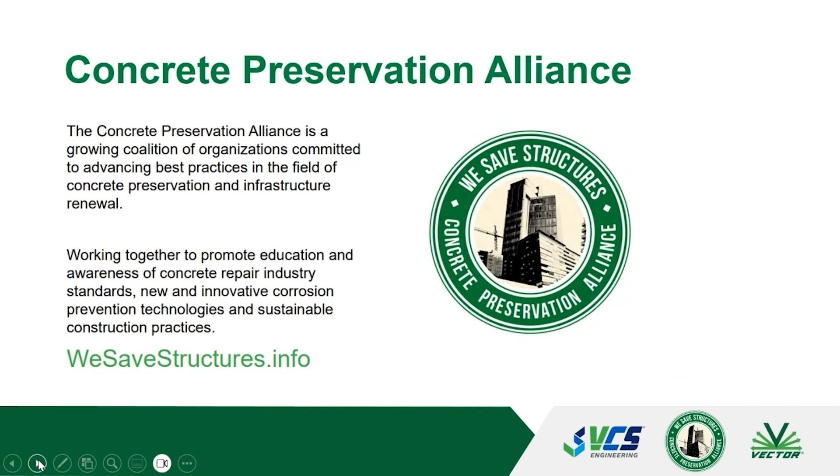Sustainability is at the heart of what Vector and the Preservation Alliance stand for. One of the most impactful actions we can take in our industry is to preserve and restore existing structures rather than replace them. Restoration not only preserves our architectural heritage but also significantly reduces environmental impact. On our We Save Structures website, we feature an environmental impact calculator. This tool allows us to compare the benefits of rehabilitation versus replacement for concrete structures. By entering the amount of concrete retained, the calculator provides valuable insights, including conservation of natural resources, reduction of solid waste in landfills, water savings, and minimized carbon emissions. We strongly encourage engineers and owners to leverage tools like this to make informed, sustainable decisions for their projects. Together, we can contribute to a greener, more sustainable future.

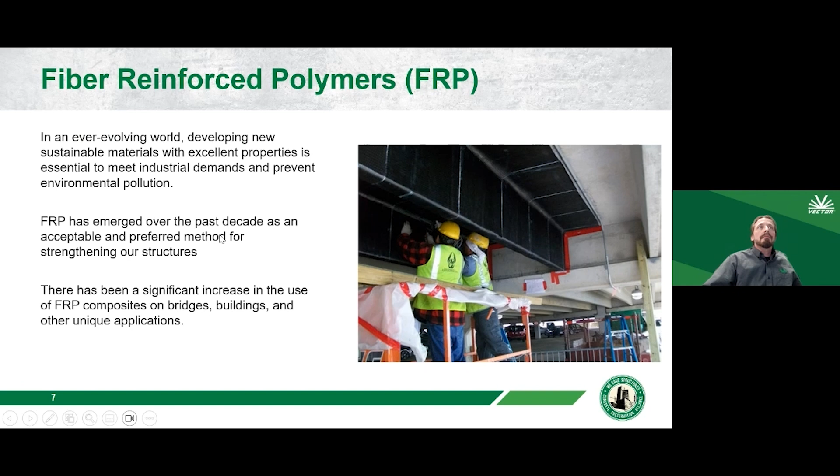For today, the presentation will consist of the concrete preservation process, where we'll take a look at how we determine whether FRP is a viable option for our structure or not. We'll briefly go over what codes and guidelines exist, what FRP is and its common uses, its considerations, the installation process, how we ensure a quality product through quality assurance and quality control activities, sustainability, and then case studies.

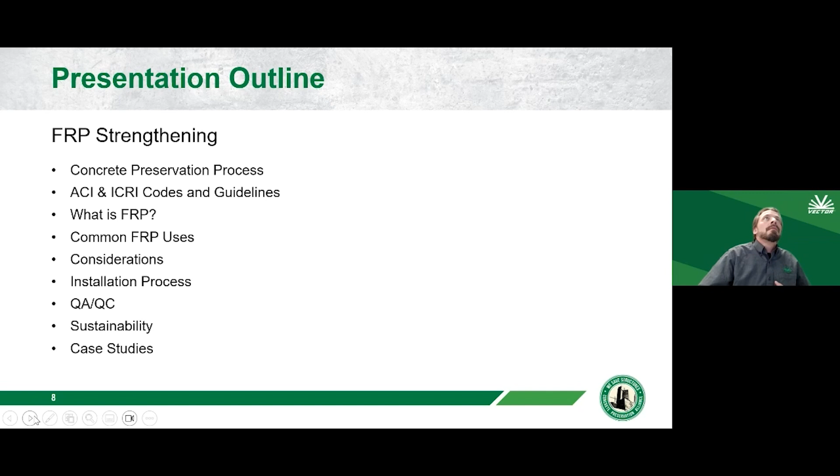When we look at the concrete preservation process, it starts usually just with a visual inspection. We want to take a look at, do we have cracks, spalls, what's going on with that structure? And then we take into account change of use. How old is that structure? What may have happened to it in its life? Was it overloaded at one point? Was there impact damage? And then what do we really want to get out of it?

As we look through this chart, the third column from the left, we have determine the cause. A lot of times with carbon fiber, we'll see new uses such as overloading, change of use, code changes. Something's changed over the years, or it's not uncommon where a brand new structure is completed and we see some defects, and carbon fiber can add additional strengthening that may not have been installed in the first place.

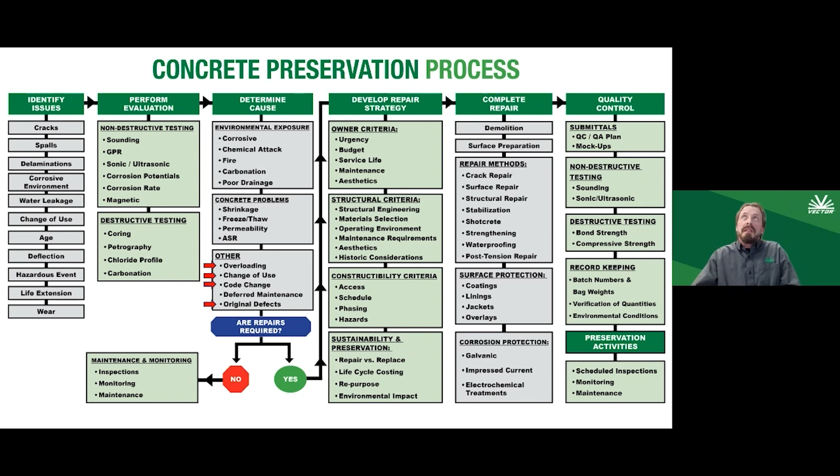Once we then look to determine the cause and why we would want to use carbon fiber, then we'll look at life cycle costing, repair versus replace, and then go through the rest of the process of doing the repairs, quality control, and quality assurance.

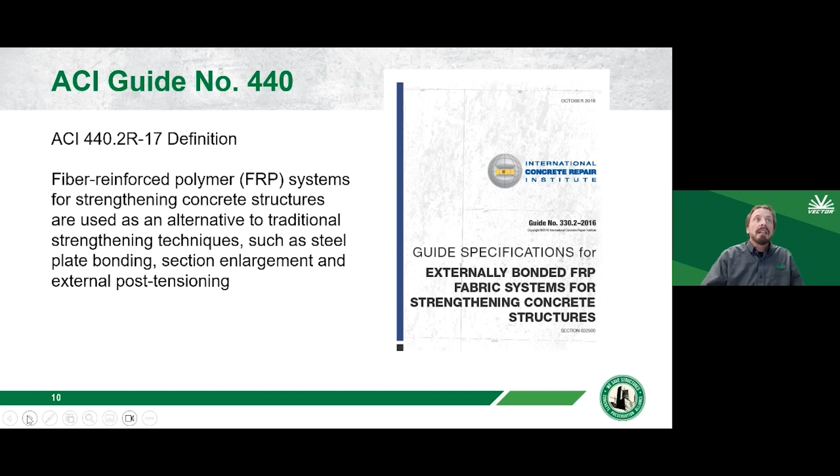Just to touch on it and know that they exist, ACI, American Concrete Institute, and ICRI, the International Concrete Repair Institute, both provide a good deal of guidance for using FRP systems. Not in all cases is FRP going to be the best solution, but if it is something that is being considered, these guidelines are a good place to start.

So what is FRP? FRP is a composite strengthening system that usually consists of either carbon or glass, and it's adhered to the surface of the concrete or sometimes installed in channels using an epoxy resin or a paste.

Carbon fiber itself is high in stiffness and tensile strength. It doesn't weigh much. They make golf clubs out of it, use it in aerospace, what have you. It's incredibly strong, lightweight. It does have good chemical resistance properties. We do have to watch it with heat because the epoxies don't like high heats, and it's got complementary thermal expansion to the parent concrete.

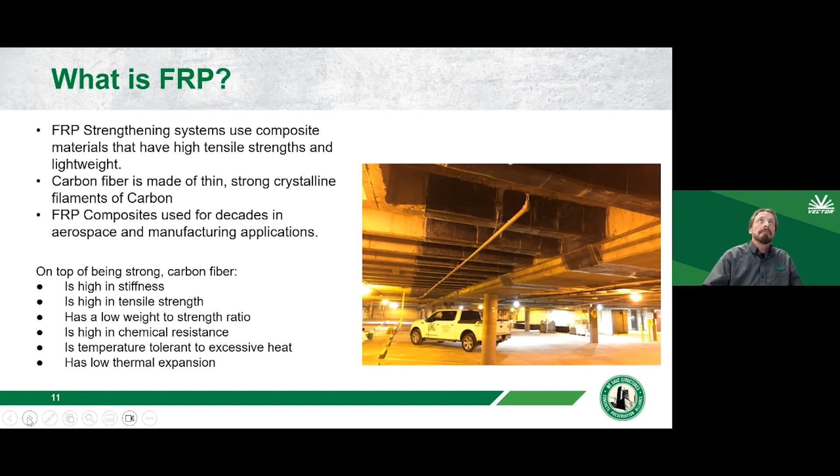Again, to reiterate, it's lightweight, it's flexible in its design. So when we look at designing with fiber reinforced polymers, oftentimes you will treat it in the same way that you'll look at steel. Is that steel acting in a flexural way, in a shear capacity, or in confinement? And in a lot of cases, carbon fiber or glass fiber will mimic those kind of design considerations.

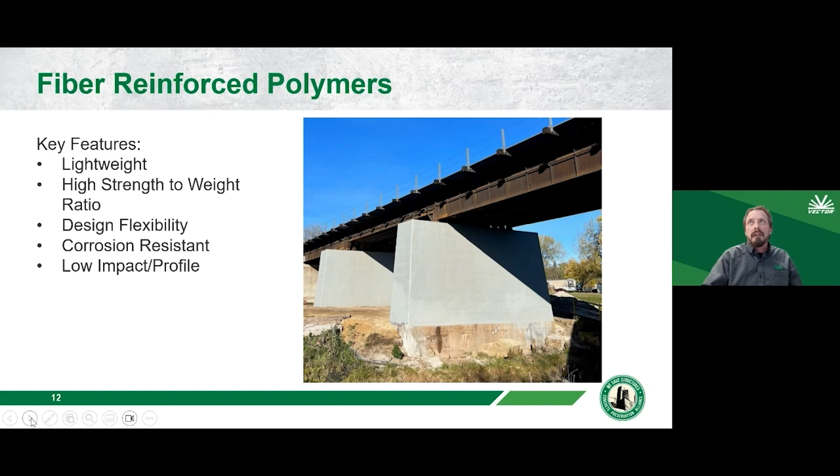Glass fiber is often used to confine repairs, to integrate repairs into parent concrete. It is cheaper per square foot or per square meter. However, the installation is identical. We use the same kind of resins. Access would be the same. Nothing really changes in that respect.

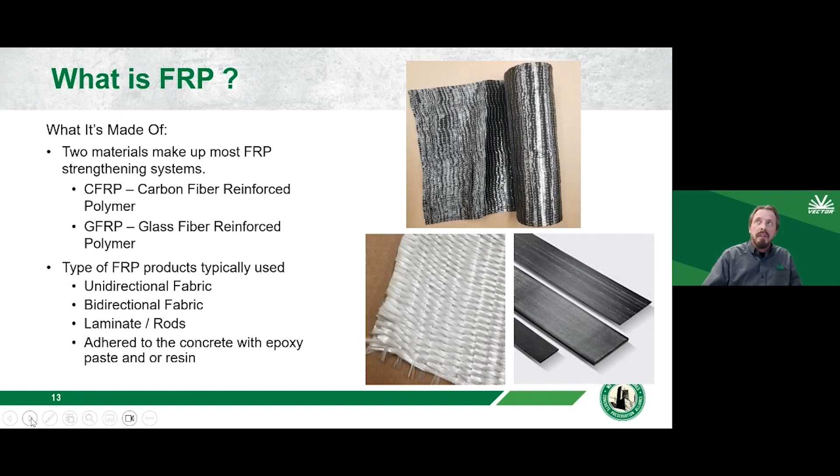As far as applications, we've seen it used on wood, steel, and then of course concrete. It's used for strengthening shear and axial loads, surface mounted, seismic upgrades, barriers. If there is damaged or lost reinforcing, so if you've lost reinforcing due to corrosion, or some wasn't installed in the original design, or for instance, change of use and loading.

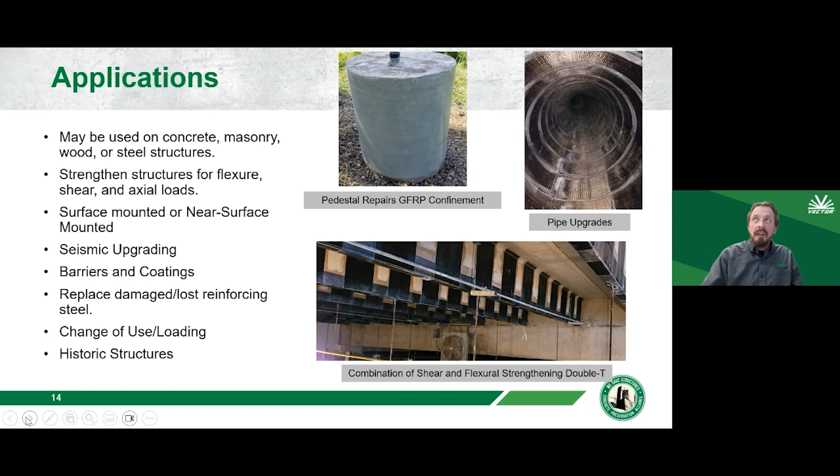We're just seeing much more of that nowadays with owners repurposing buildings for different uses, and then of course historic structures. In the top photo there, we have used glass fiber just to confine that pedestal, pipe upgrades, which is a whole different kind of situation where carbon fiber and glass fiber is used. I'm not going to touch on it too much today. And then of course, conventionally, we see beam strengthening in a flexural way with shear wraps.

Benefits of using FRP, like I said, it's light, it's low profile. We don't need just adequate scaffolding. We've done a lot of carbon fiber, glass fiber installations over the years using aerial lifts.

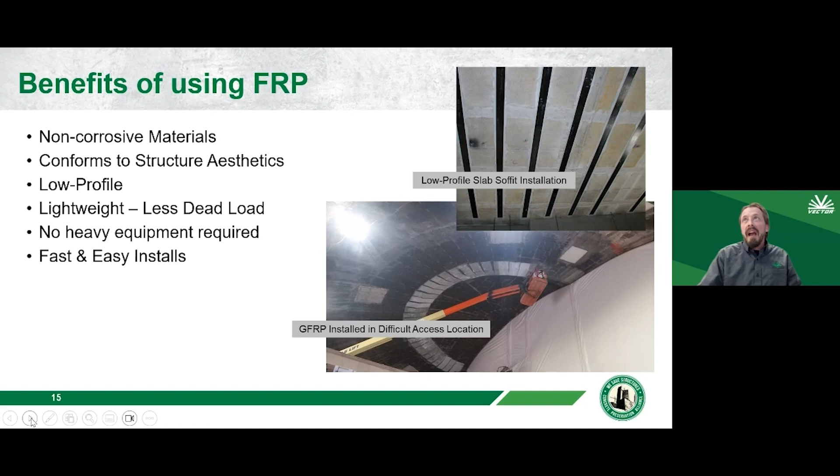Pretty fast and easy to install, and you get a lot of strengthening for that effort. Some of its disadvantages...

Carbon fiber, you do pay a premium for the material itself, but you typically save on your labor costs. One thing you need to be aware of when using fiber reinforced polymers is that they can conduct heat and electricity. It's not common, but it's just something to be mindful of when you're looking at this as a possible solution.

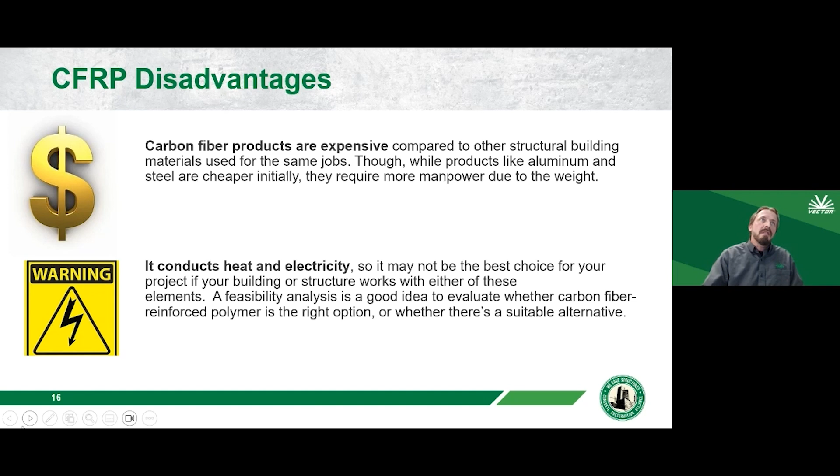Project-specific considerations. So I come from construction, I'm not an engineer, I'm not a designer. So these are the types of things that I'm really looking at when I'm working with an owner on using FRP as a solution.

We want to know what the access is. How long will that access be there? Because that has a cost to it. And will that access disrupt the operations of that facility? Will it affect pedestrian or vehicle traffic?

Of course, building codes. So when we're using FRP in a residential or a commercial setting or a facility that is habitable, these are things that we're going to have to look into and make sure that if there's fireproofing that needs to be installed, that we account for that in the development of the project.

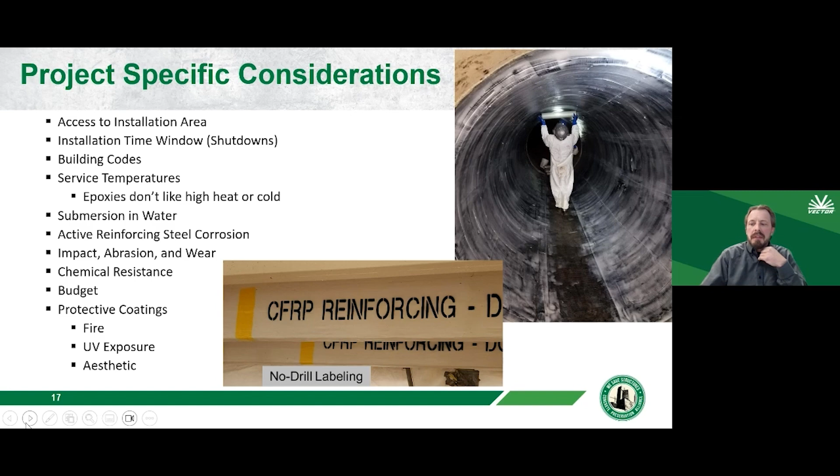The nice thing about FRP is that it can be coated with a top coat, typically an acrylic or a urethane, that is relatively inexpensive.

What we don't want to do is have active corrosion going on, wrap that structural element, and then that corrosion still keeps perpetuating, and we've got spalls and delaminations of the surrounding concrete. It's a big deal, and what happens is that if there's fracturing going on inside of that column because of active corrosion, that carbon fiber isn't participating fully within that structural element.

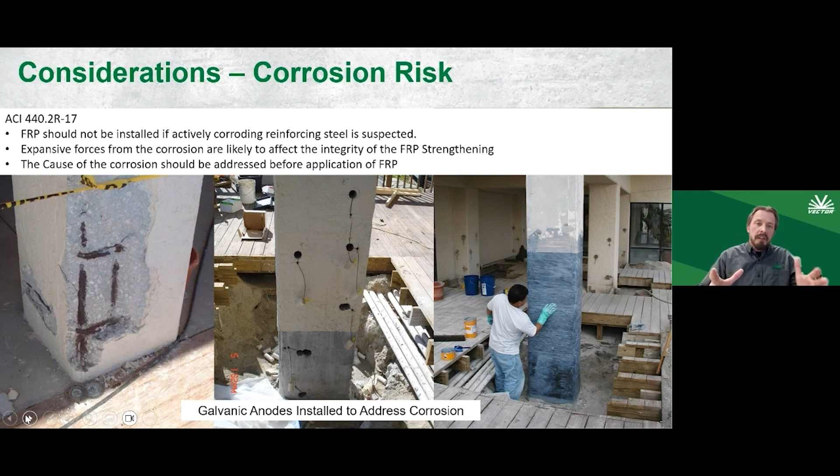So the project process, the pre-construction items. When we looked at the development process for repair, condition evaluation, and assess the damage. So we want to know what the existing conditions are, and these are all going to fall in line with what that FRP designer is going to need to develop a design for the structure.

We want to know the condition evaluation and assess the damage. Is there widespread chip and patch repairs that need to be done? Are there crack injection activities that need to be performed prior to installing any sort of strengthening?

I've been on projects where we've done both, where we've got the original plans. That's fantastic. We know what the reinforcing is there.

Sometimes we'll verify it just to be sure with ground penetrating radar. But a lot of times, especially on an older structure, the plans just simply don't exist anymore. So we're going to take that information and give it to the engineer of record or the FRP design engineer.

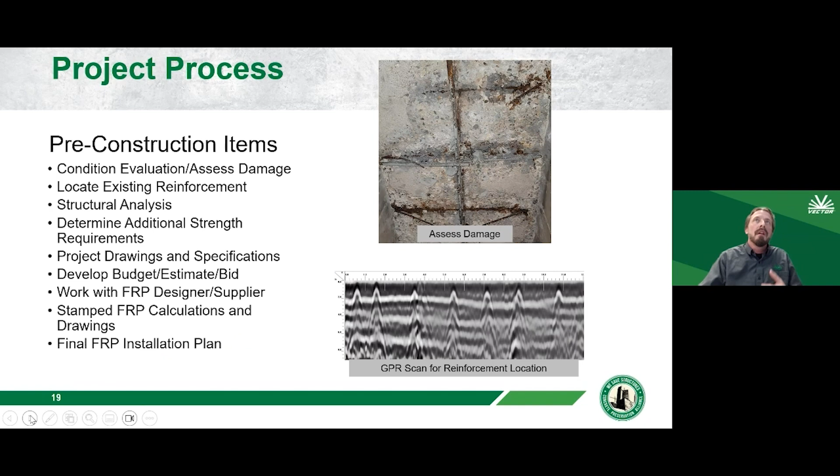After all of that, the rest of that process will include the FRP design shop drawings, and that's what the construction crews will use to install the FRP. Typical FRP design drawings are usually very simple. They don't need to be too complicated. We need to know spacing, offsets, and size of the fabric, so we can determine how much fabric or material we're going to need to install.

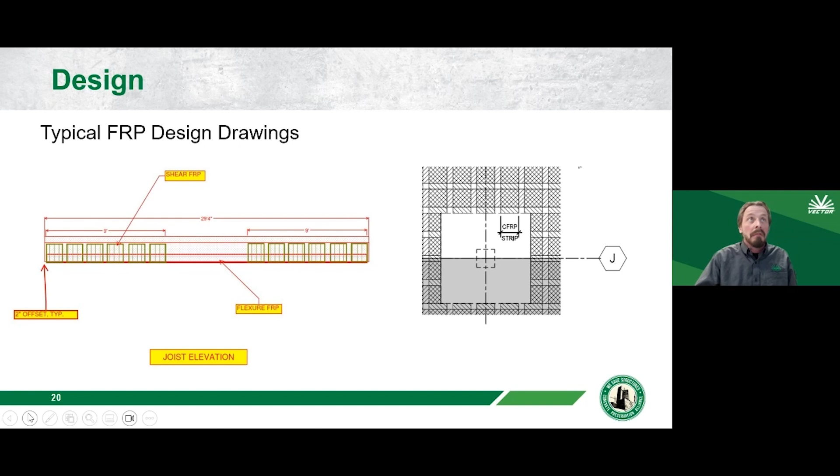Safety considerations: the surface prep for FRP is critical, and it does create dust. On smaller projects, we can use an aggressive disc on a grinder. For large projects, it's preferred to use sandblasting. Either of those activities are going to generate a fair amount of concrete dust.

So we want to make sure that we have the right kind of containment and make sure that the installers have the proper protective equipment, whether that be a respirator, eye protection, ear and hearing protection, and that we meet all of the different OSHA standards. Additionally, when we install the FRP, we're using epoxies, and epoxies of course then require their own set of safety considerations: eye protection, different gloves, Tyvek suits, what have you.

So all of this will factor into the price of the installation. If we're installing something in a hospital, the containment is going to be much more robust than a bridge out in the middle of nowhere, and we're going to have to account for that.

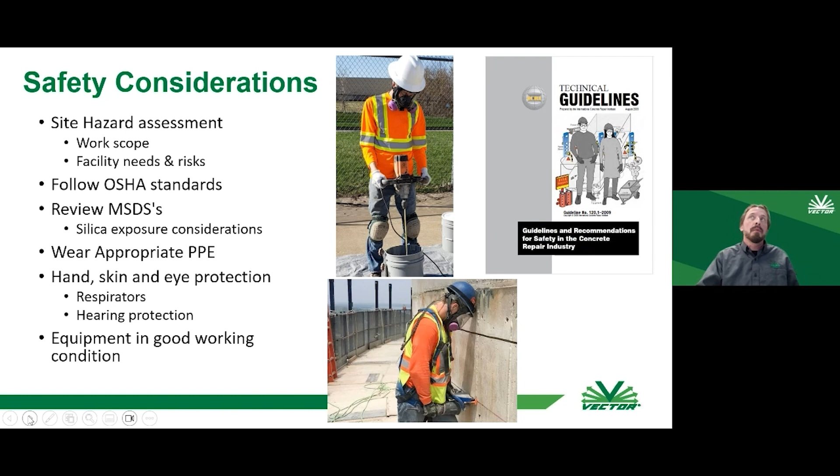Once we've got those variables figured out, we get into the layout of the FRP product. As you saw in the design, we wanted to put FRP on a beam. This beam is coated, and we want bare concrete. We can't install FRP over any sort of coating, paint, or anything else that's there. So we grind the existing coating off and open up the pores of the concrete. We want that epoxy resin, and we want the ability of that resin to adhere as best we can to that parent concrete, and then we make sure that it's all cleaned up and ready to go.

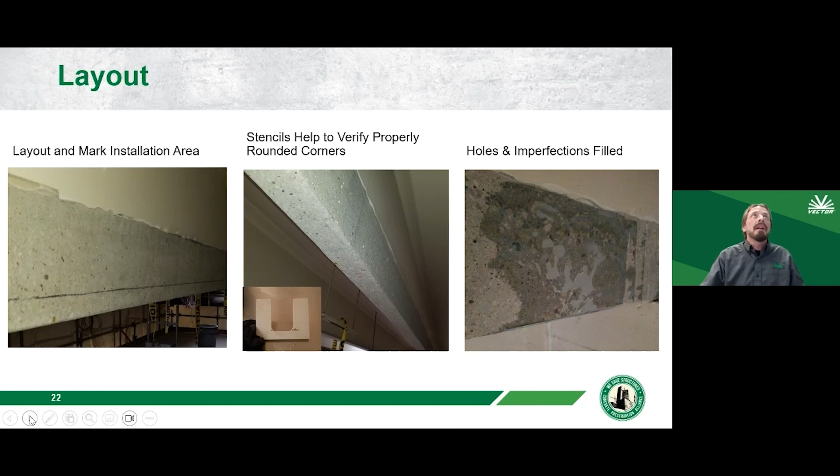The project process is fairly straightforward. We repair the cracks, usually by epoxy crack injection, and address concrete spalling, restoring the concrete to its original cross section, and then allow for those repairs to cure. Typically, when we know we've got to do repairs and then FRP right after, we'll use a high performance repair mortar. Again, it's going to cost a bit more, but we're going to save on time. So we want something that sets fast, sets hard, and hydrates quicker, so we can get on it and install the FRP quicker.

Oftentimes we don't have full access to the FRP repair or installation area. We know we need to strengthen some beams, but in the development process we may not have access to all of them. Once we have access, we confirm the measurements match what was designed. If there are discrepancies, it's typically not too big of a deal, we get back to the FRP designer and discuss what to do, whether that involves different detailing or adding some FRP. We're typically very conservative early on in that process.

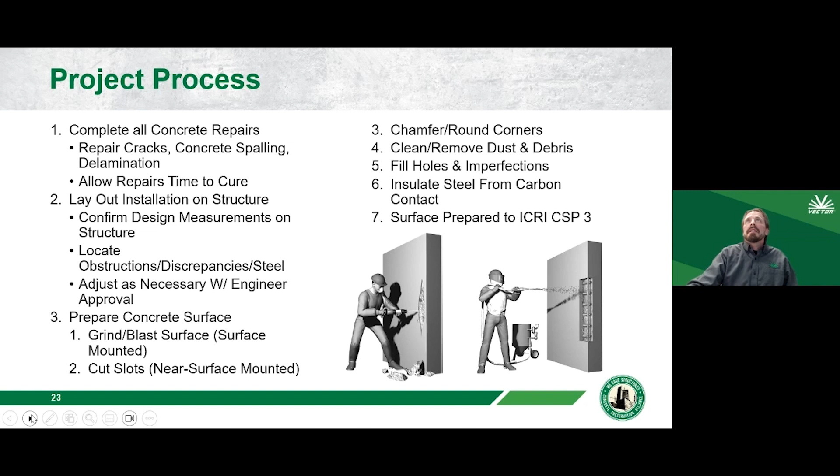An important thing to note is that the concrete must be cleaned and prepared to have a surface profile, CSP, concrete surface profile of 3. ICRI, the International Concrete Repair Institute, provides really good guidance on this.

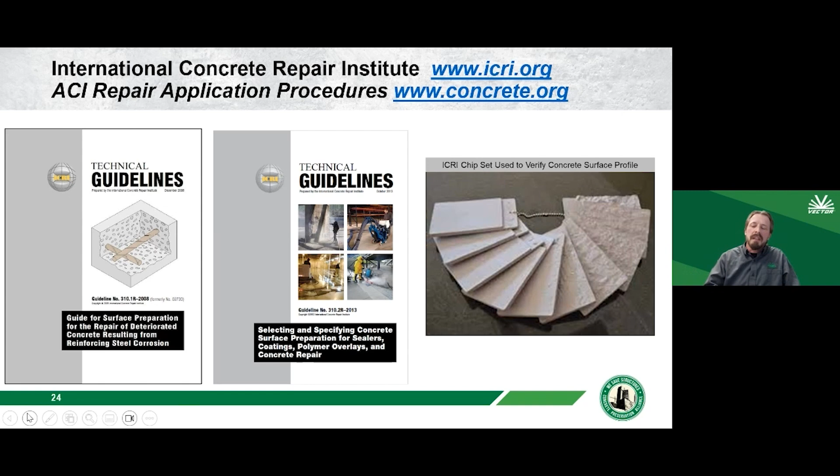As you see on the right, we have the ICRI chip set. In the field, you can bring this chip set with you and say, here we need a CSP 3 or 4 - this is the texture of that concrete - and compare it to what the technicians have achieved during their surface prep.

Typically that's achieved by a very aggressive disc on a grinder or by sandblasting. This holds true with all coatings that go on concrete. You're going to see a concrete surface profile identified by the manufacturer, and we want to make sure we achieve that profile prior to installation of either the FRP or a coating.

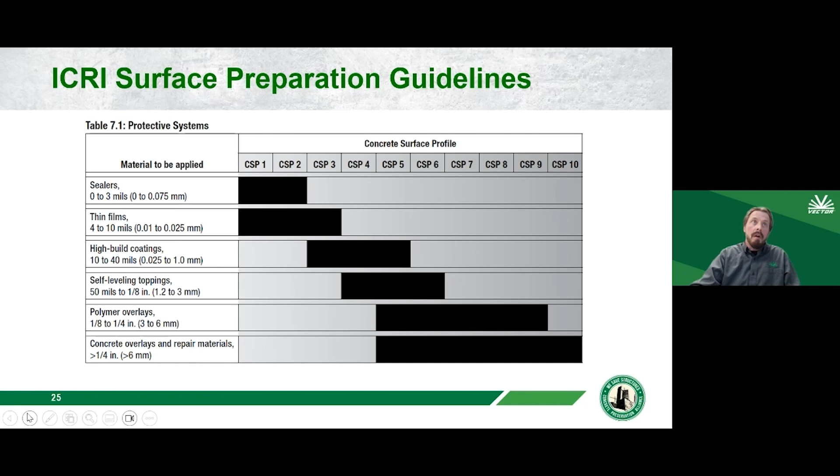Once everything is surface prepped to the correct profile, we get into installing the FRP itself. We want to set up as close to the installation area as we can, especially if dealing with hot or cold temperatures, to expedite the process. We saturate and then get the fabric or laminate onto the concrete that's going to be protected, giving the technicians time to work it over and make sure it's well adhered.

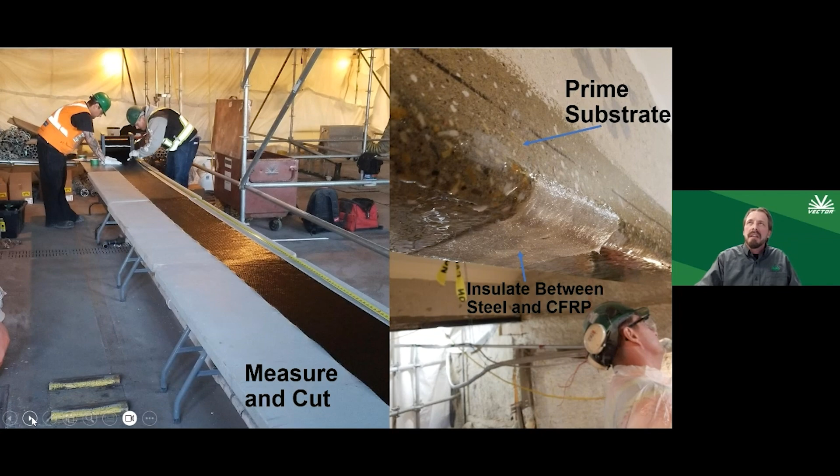One thing of note on the right-hand photo: insulate between steel and CFRP. Anytime there is embedded metal or steel, we have to isolate it from the carbon by using glass fiber. Carbon will react to embedded steel or metals, and carbon will deteriorate over time if this goes on too long. It's not that big of a deal, we just need to be aware of it. So if there's anything embedded that needs to remain, it's not a big deal, we just need to make sure it's isolated.

A typical installation is to cut the FRP to size. FRP typically comes in a 300-foot roll, depending on the type, but we want to put up the largest pieces possible - we don't want to splice if we don't have to. If we do overlap, the FRP designer will provide what that development length or overlap length needs to be between two different pieces. But the objective is always to put the biggest pieces up possible.

On this project we had flexural strengthening. You can see the fellows on the right putting up a flexural piece, with some stirrups and U-wraps around the bottom of the beam. So we put the big pieces up, and our offcuts get cut into smaller pieces as required.

We do the surface prep, then saturate the surface of the concrete with an epoxy resin and let it become tacky. Then we saturate the fabric itself - you can see the technicians there rolling the fabric, trying to work the saturant into it. We do have layup machines we can use as well.

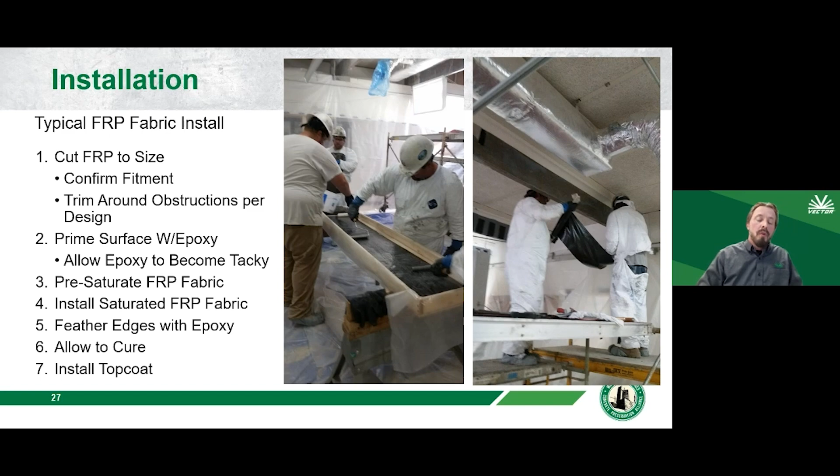So you can do this by hand, or with the machines - we use those on very, very large projects to saturate the fabric. Once it's fully saturated, we install it into place, work it over by hand, and allow it to cure. Once everything's cured out, we can install a top coat.

So you can see the layup table. The technician on the left is saturating the resin, getting it ready for installation. And then on the right, you can see on the seams, they've detailed the edges of the carbon fiber fabric with a paste epoxy. That's just to ensure that the edges are tightly adhered to the concrete using a paste epoxy.

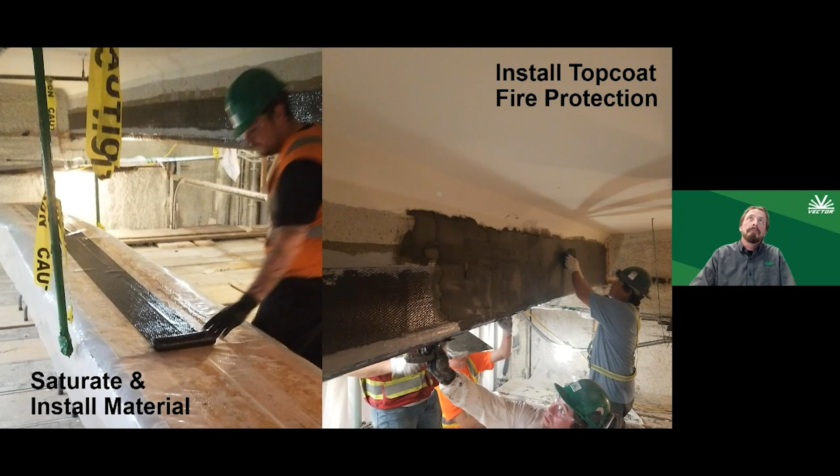Quality control is critical. This is part of a structural design. There are different steps to this process that need to be done correctly along the way. So we have ways of testing and checking and making sure that it's being installed per plan, per design, and that we don't have any problems down the road.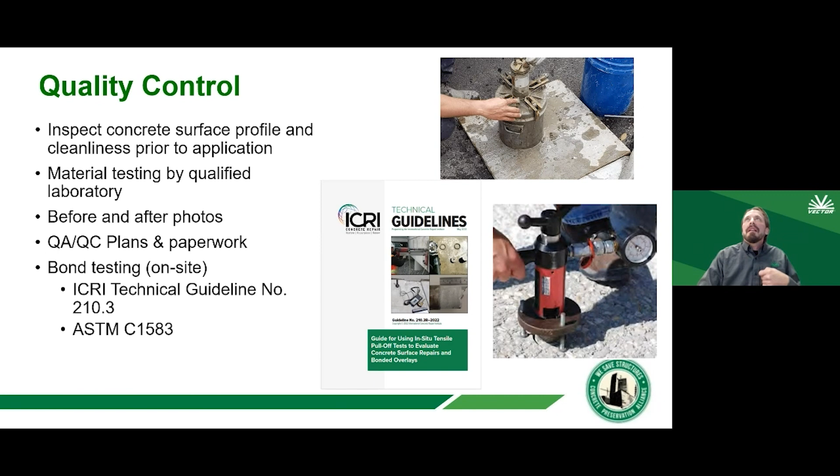So before and after photos are a great place to start. We have QA, QC plans and paperwork, and then of course ICRI and ASTM do provide different standards for testing and ensuring that we have a proper installation.

So quality control, this is a typical sheet. We want to know what's the ambient temperature. We don't want to install this when it's blazing hot or if it's incredibly cold. Epoxies don't like hot temperatures, and they don't like cold temperatures. So we want to make sure that our ambient temperature, whether it's inside of a containment or inside of a building or whatever, is correct and not too hot, not too cold, and that steps are being taken to ensure that the layup environment is conducive for the installation of FRP.

We don't want high relative humidities or dew points where we're having condensation of water on the concrete. You might see that in a coastal area or something like that. Surface temperature, and then making sure that it's not wet or damp.

We do use a moisture testing meter where we can set it onto the surface of the concrete and it'll tell us the percentage of the moisture on that concrete. Typically we want the moisture below 3% prior to installation of a carbon fiber fabric.

And then we want to document the lot and the batch numbers to make sure that if down the road we've had a bad batch or something was wrong along the way, it's documented. We know that, hey, beams 2 through 5 have this lot number, and then the other beams are that lot number. And then of course our bond pull-off tests.

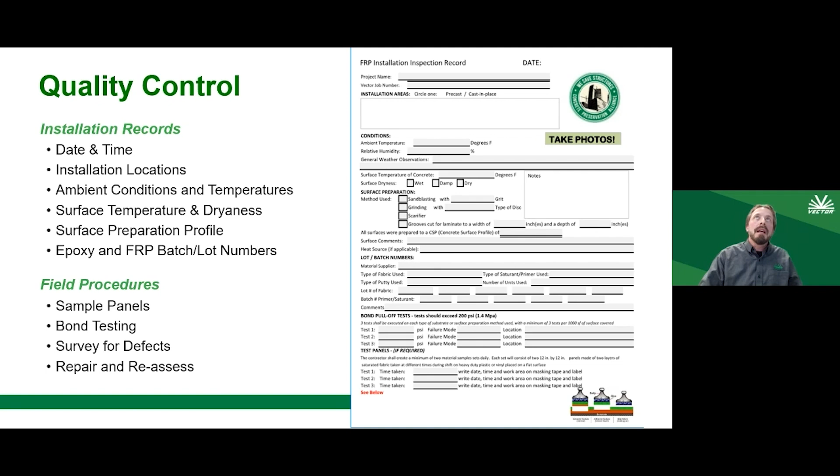So pull-off test is pretty straightforward. These can be done at random, and then you would have to put another piece of carbon fiber over the top of it. Or a lot of times what we'll do is put an extra piece up that we can use for testing so that we're not putting holes into the fabric that is part of the design. We want to make sure that this will tell us if we've mixed our epoxy correctly, that we've got the correct surface prep done on the concrete itself, and that the installers have laid and installed the fabric as tightly to the concrete as possible.

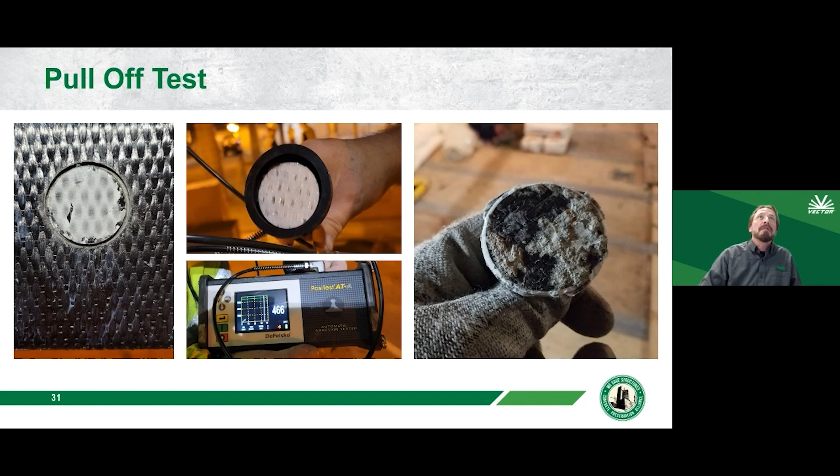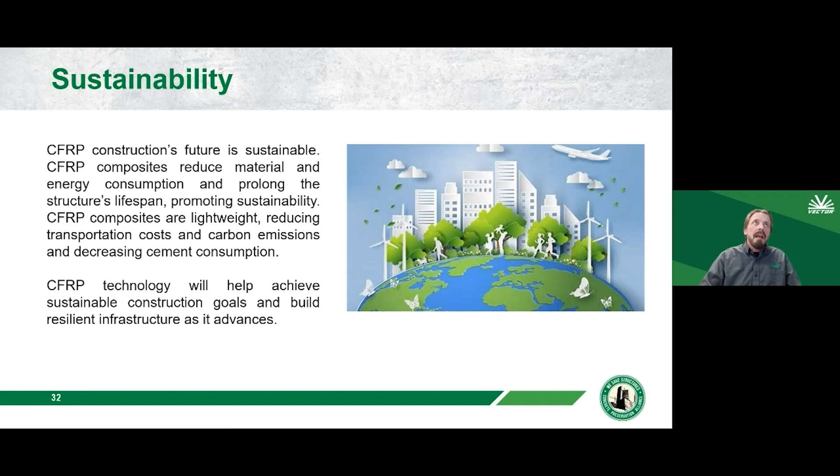This is one tool that we have to ensure sustainability of our structures into the future. The objective is to utilize what we have in our infrastructure and take care of it, maybe repurpose it for other means, and FRP is a technology that we have at our disposal.

Seismic retrofitting, where are we seeing it often now? Of course, different parking structures and bridges and those types of structures, but we're also doing a lot with seismic retrofitting, and then the increased use of EV. So EV vehicles are battery powered. Those batteries are heavy, and so now we're looking at parking structures and adding carbon fiber and strengthening those parking structures.

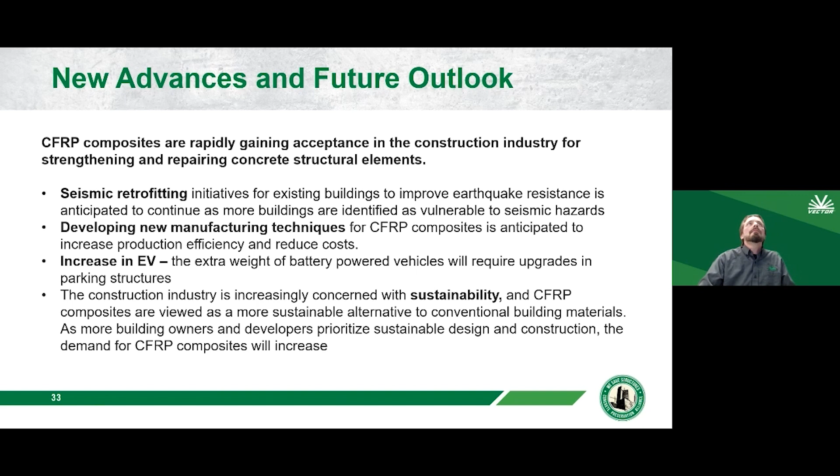To accommodate that, we're going to jump into a wind farm project that was recently done in the Midwest here. As you can see, these are large structures. The concrete foundation and pedestal take quite a bit of load. In this case, the engineers were able to say, hey, FRP is a good solution for what we're needing for the performance of this pedestal and foundation.

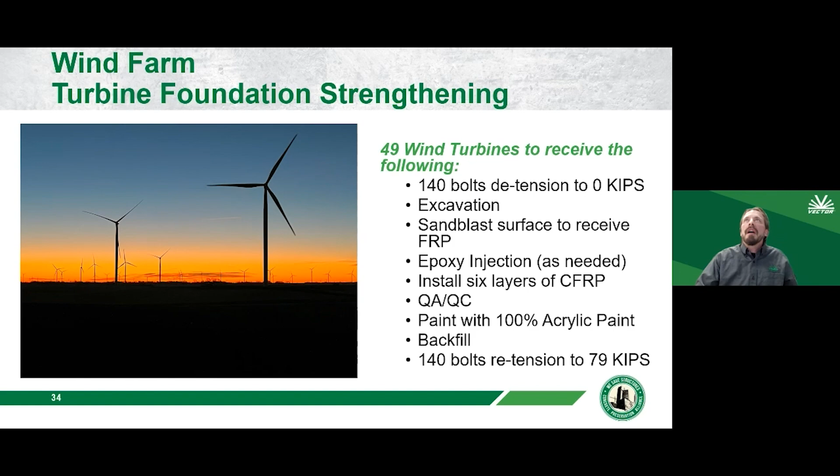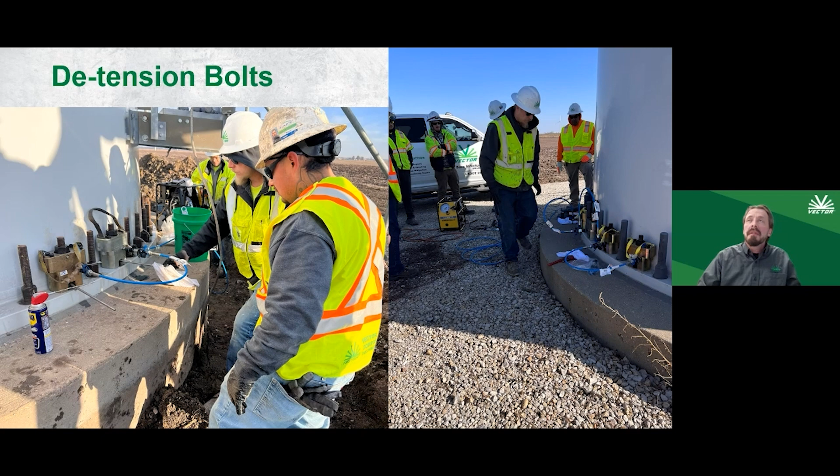So in order to do that, we had to detension the bolts. There's 140 bolts, with a row on the inside and the outside of the steel shaft that are embedded down into the foundation of a wind tower. They detension all the bolts and then begin the excavation process so they can install the FRP fabric.

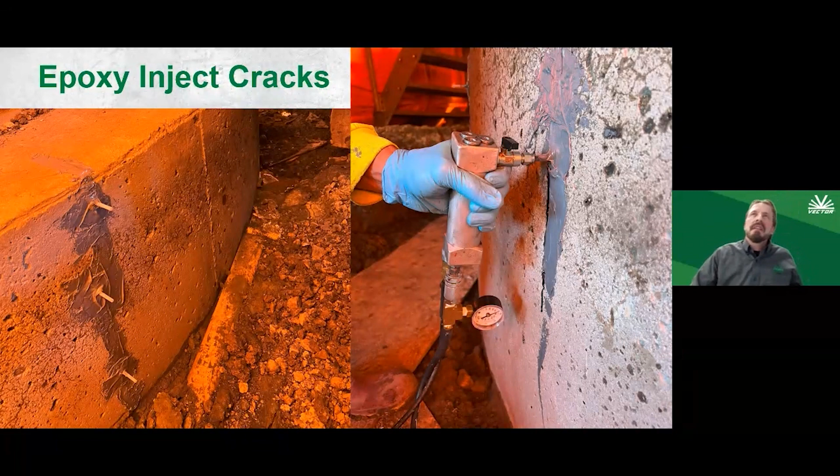Prior to the installation, once they excavated and exposed the foundation, they saw there was cracking involved. So the simple fix was to inject all the cracks with epoxy, let that set up, and then perform the FRP installation.

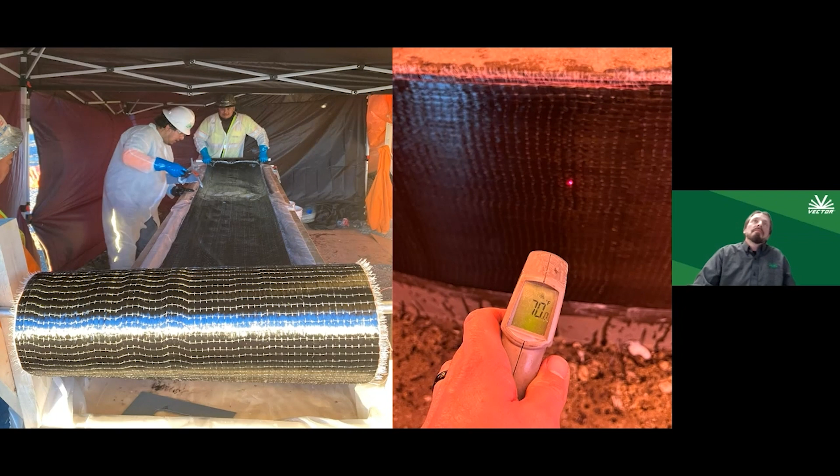In this case, the FRP was installed during the winter, so the containment was set up with heating so we could bring the temperature of the concrete up to an acceptable heat, and then wrap everything, using that same heat to allow the FRP fabric to cure in place. It was a constant process, and on our layup table we want to lay up as big of pieces as we can around the circumference of that foundation pedestal.

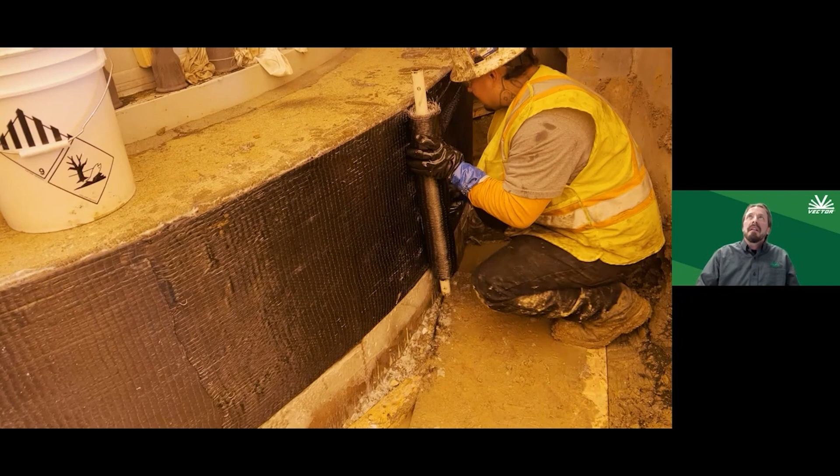So we saturated the fabric. Typically we'll use a dowel or a piece of pipe for very large pieces that are going to be installed. Get everything saturated, get it into the technician's hands so they can work with that fabric and get it installed. You don't see in these photos that there are other technicians behind the installer smoothing down the fabric, getting rid of the bubbles, and making sure it is as well adhered to the concrete and subsequent wraps as possible.

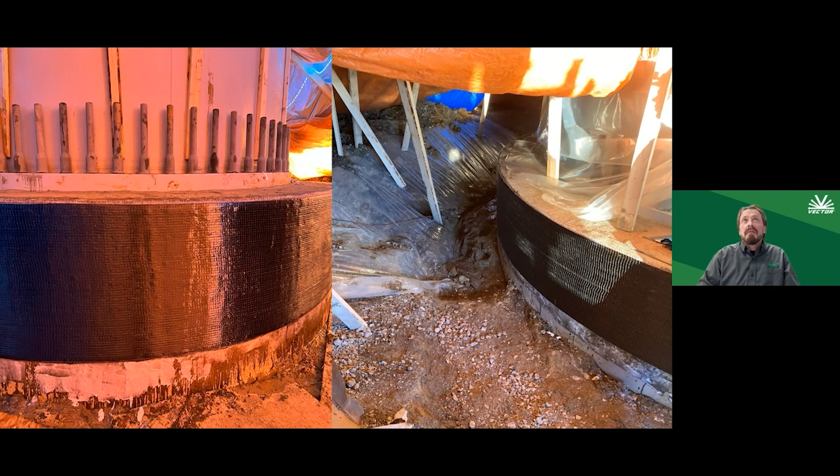So the final product is pretty simple. This one, I think, received 6 layers, or 2 or 3 double layers of fabric.

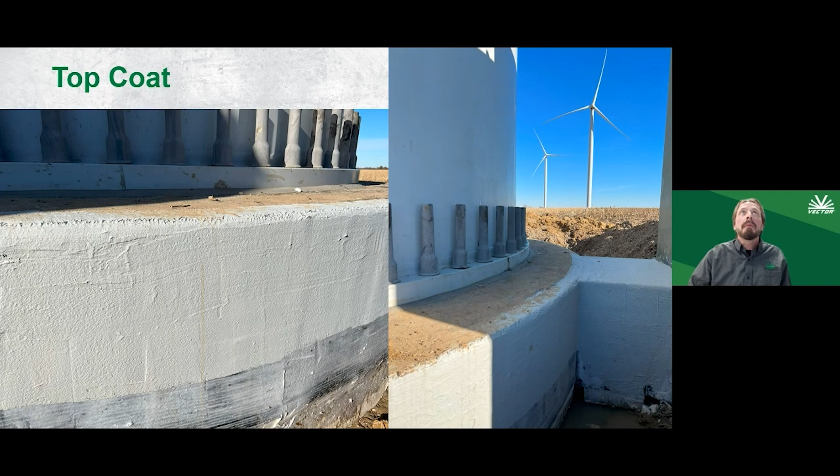They get everything laid up, get everything cured, and then because this is going to be exposed to the soil and UV, at least on the top of the pedestal, they put a UV stable acrylic top coat over the top of the FRP fabric.

This is an interesting project. We did this one a number of years ago. An old railway bridge out in the middle of a forest, right next to the river. The river is high during the spring, summer, and fall months, so the best chance to get at this pier was during the winter when the water was at its lowest. This is located in Minnesota, so they've got plenty of winter.

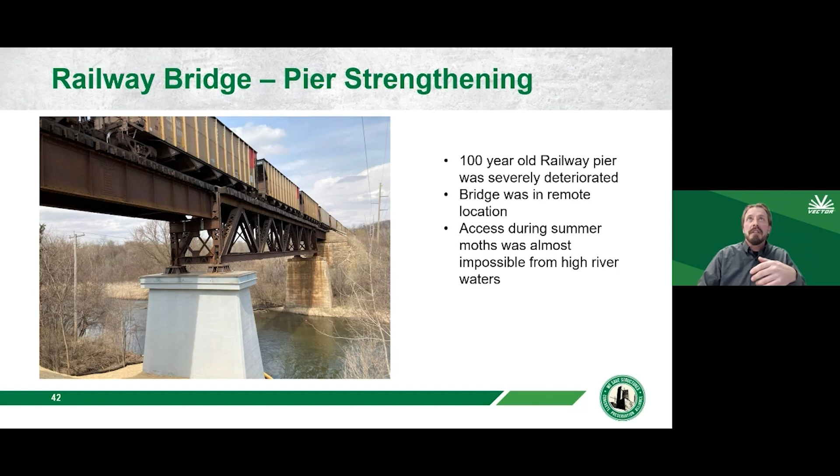We needed to provide containment for this whole installation. As you can see, there was significant damage and deterioration of that pedestal over the years. The pads underneath the bearings, and then down into the pedestal itself, had some fairly good sized cracks that needed to be addressed.

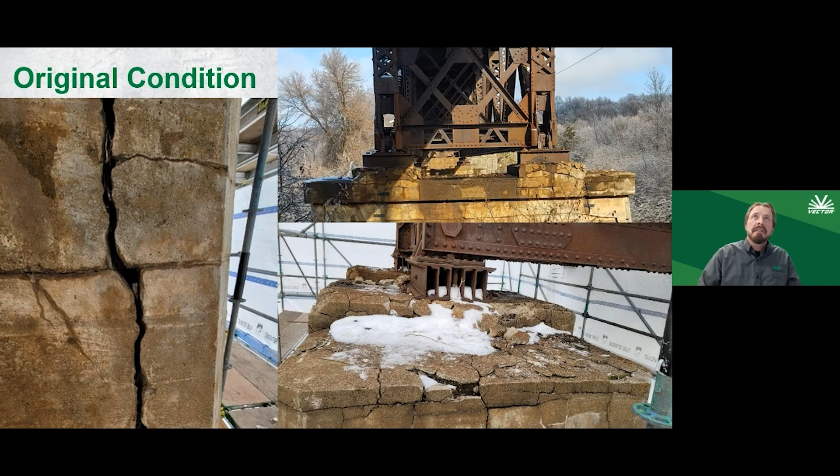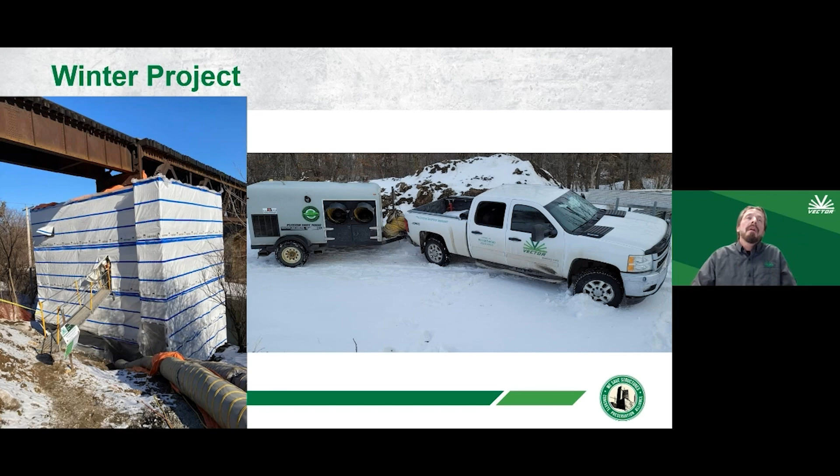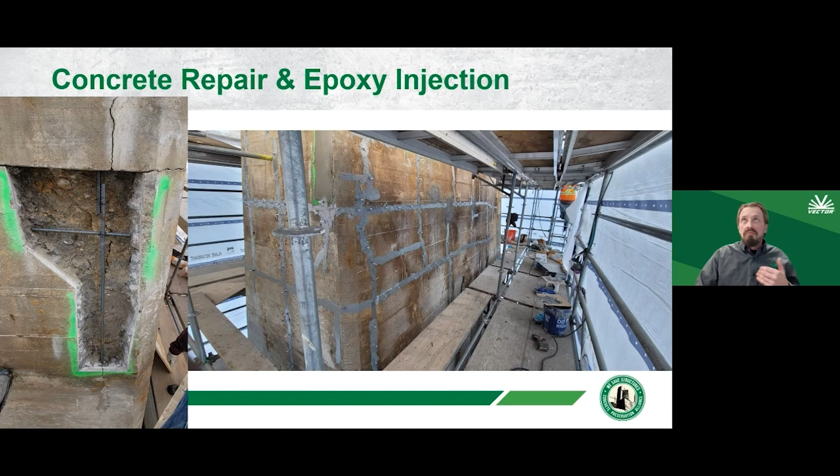Once all of that was done and completed, we performed the surface preparation and then wrapped this pier in carbon fiber. Rather than building a big encasement or something like that, in this case we performed the chip and patch repairs, fixed the cracks with epoxy injection, then wrapped and confined it. As you can see, there's some vertical placement of FRP, so that designer, that's what they had detailed for this project.

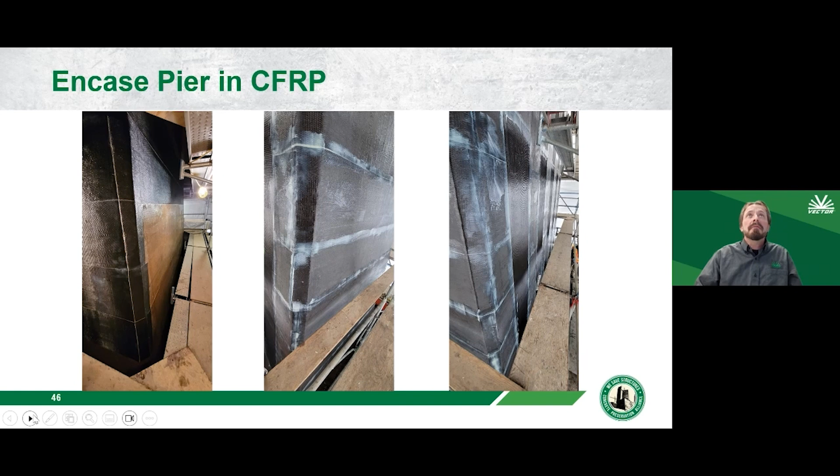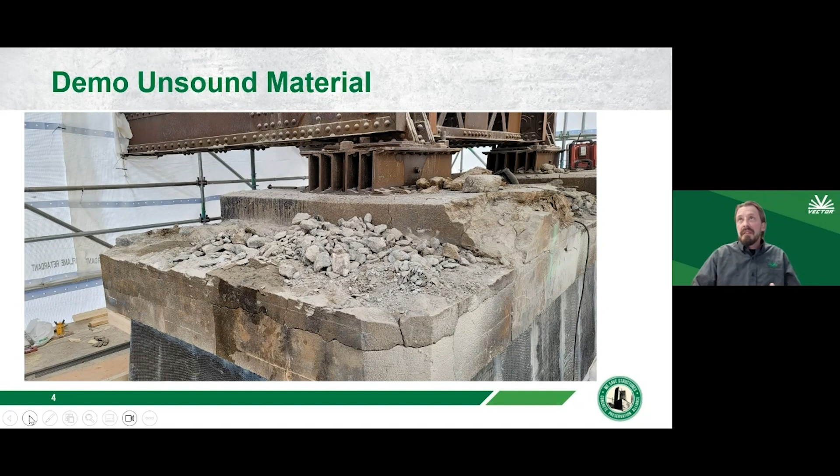Once it was complete, we top coated it with a UV stable coating, and then we had to address the pier cap itself. As you can see, it's in very rough shape, rubbled. What they decided to do on this one was add additional reinforcing, just like a conventional encasement, and then picture frame it with a steel frame that was acting as a stay-in-place form. So again, you're going to get a lot more confinement out of structural steel, so that's what they decided to use.

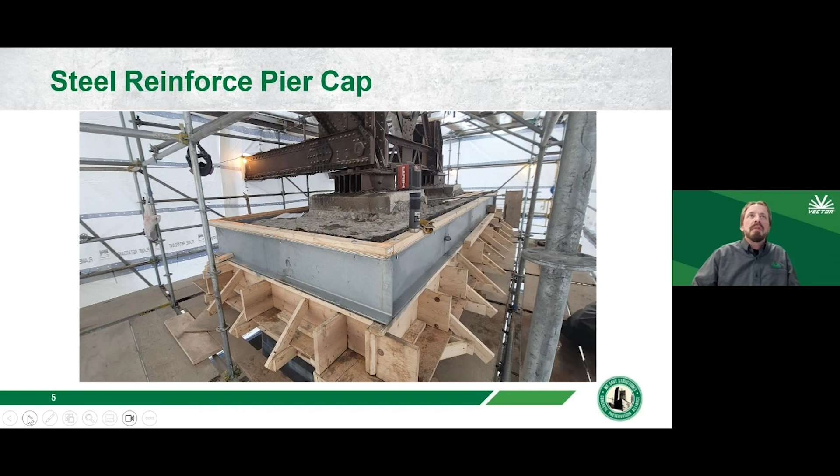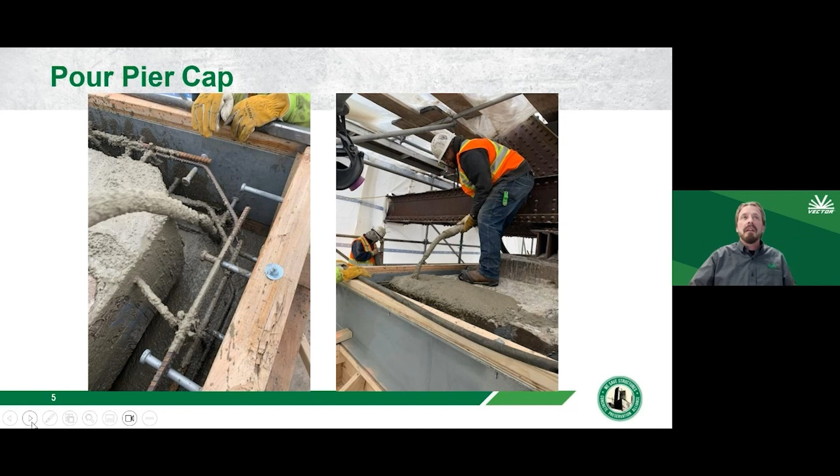Installed the reinforcing, doweled it in, epoxied it in, installed the steel frame. As you can see, it's got the anchors and the Nelson studs to ensure that all of that is participating as one unit. And then you've got the technician on the right casting the overbuild.

Once all that was done, they installed an epoxy leveler so that those steel bearing plates and pads were participating fully and had full bearing onto that pier cap pedestal.

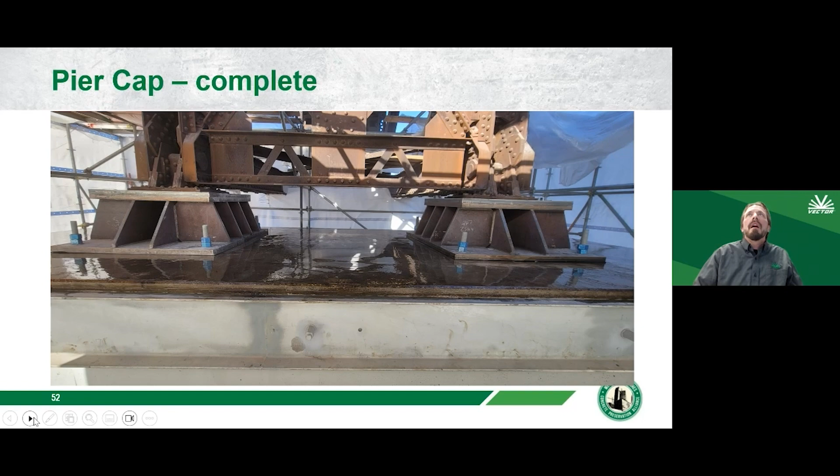And there's your before and after. Like I said, you can see on the left it was in really bad shape. On the right, the rebuild turned out quite well.

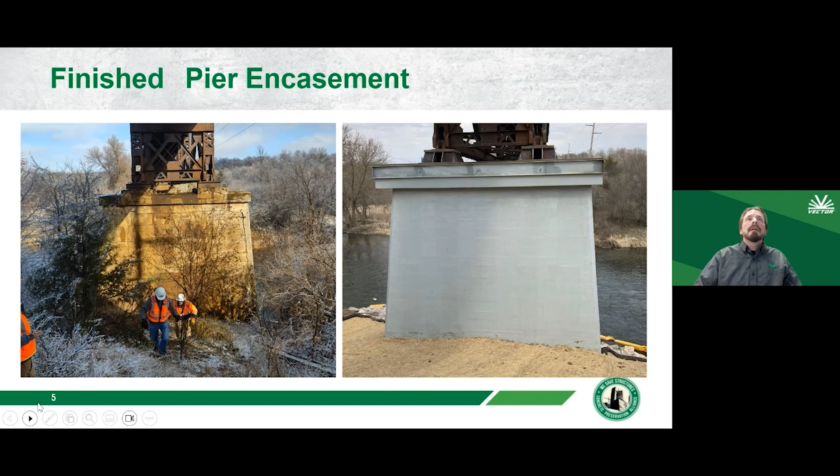Another project, similar, but a very different mode of deterioration. This was a bridge constructed in 1912. Back then, they didn't have a lot of reinforcing steel, so they just cast mass piers and mass abutments.

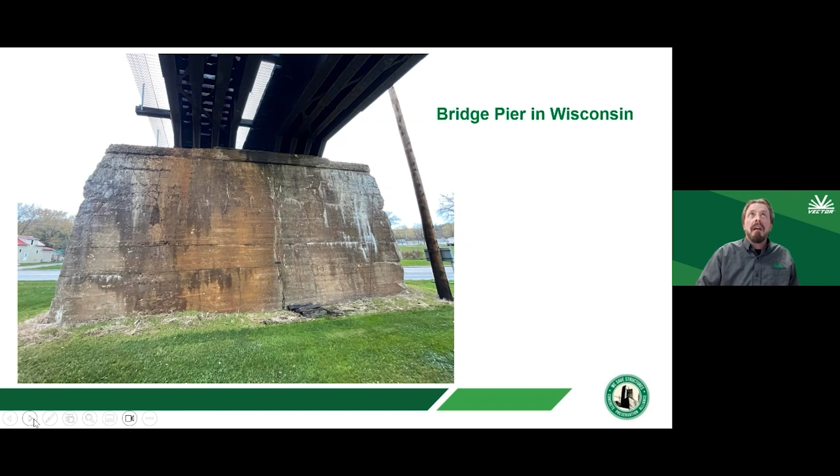For the abutment on this pier, we were able to take a lot of the bad concrete off and do an encasement, add dowel-in reinforcing, put a mat up, and shotcrete it back. You can see there's a sidewalk and the road right next to it, so we didn't have a lot of room to provide an overbuild. But there was enough concrete there that we could remove the bad stuff and just do a conventional encasement. There was no carbon fiber on the abutment.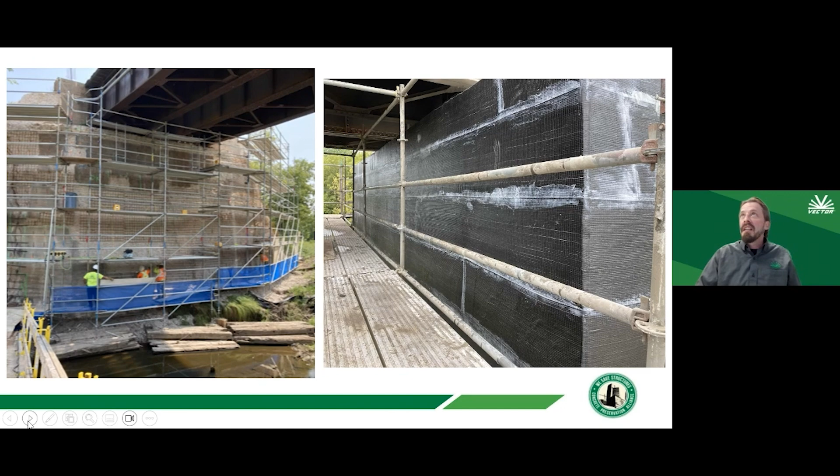However, on the piers themselves, we weren't able to overbuild them. One of the piers was right on the roadway, so we had absolutely no room to add additional reinforcing and do an overbuild. In that case, confining those repairs in carbon fiber made the most sense, and that's what you're seeing on the right. They wrapped the piers in carbon fiber and detailed the edges with a paste epoxy to make sure those edges don't peel.

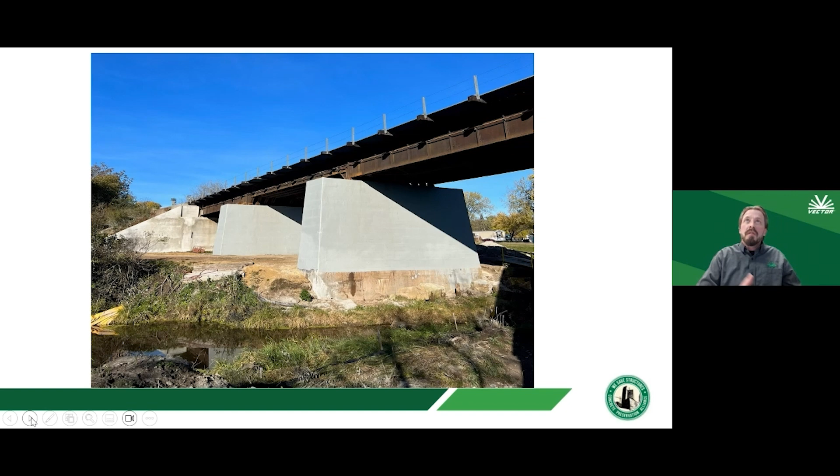Once that was completed, they coated the piers with an acrylic paint. What you don't see in this photo is that in the background there's actually a road, and that's why they had to wrap them instead of perform an encasement. So long story short, in some situations an encasement might make more sense than wrapping, and we used both methods on this structure.

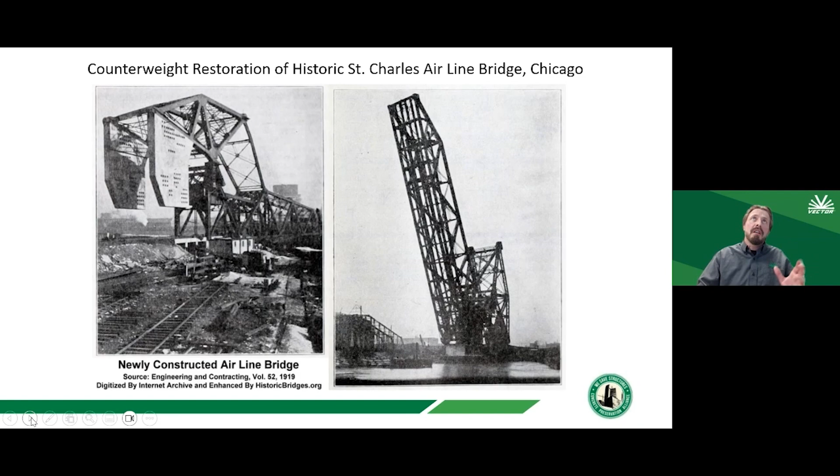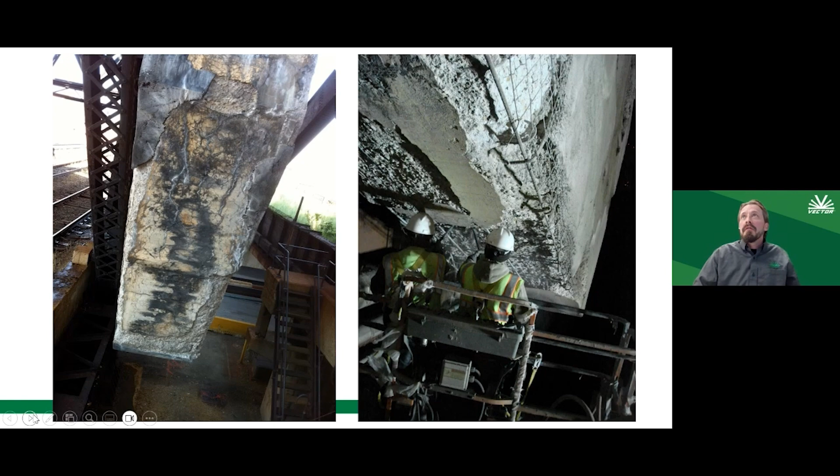The counterweight restoration on the St. Charles Air Line Bridge in Chicago — this is a bascule bridge. Again, historic, old bridge, had a very large concrete counterweight on one end so they could raise the bridge. Over the years, freeze-thaw damage deteriorated a significant amount of cross-sectional loss of that concrete over time. What they wanted to do on this one is rebuild it, restore it back to its original cross-section, and make sure they had adequate weight to lift that bascule bridge again.

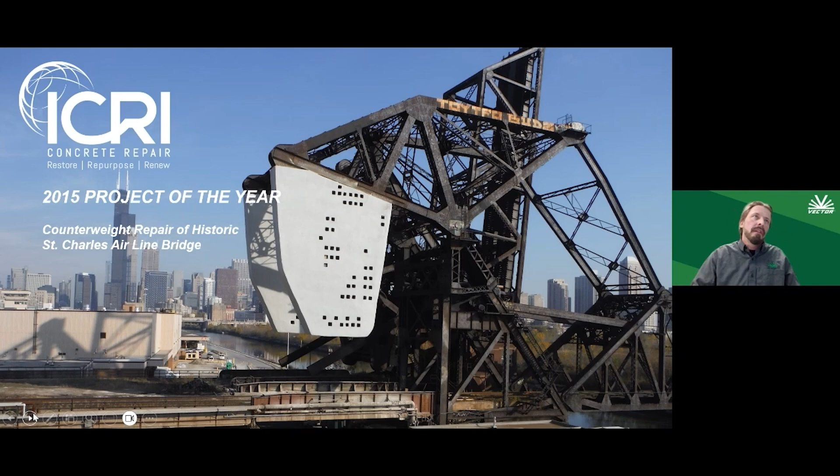Then they wrapped it in glass fiber and put a top coat over it. So it looks like regular concrete, but in all actuality it's an overbuild with shotcrete wrapped in glass fiber and coated with an acrylic paint. It did win project of the year, and if you look on ICRI's website, I think you can find the write-up on this if you're interested.

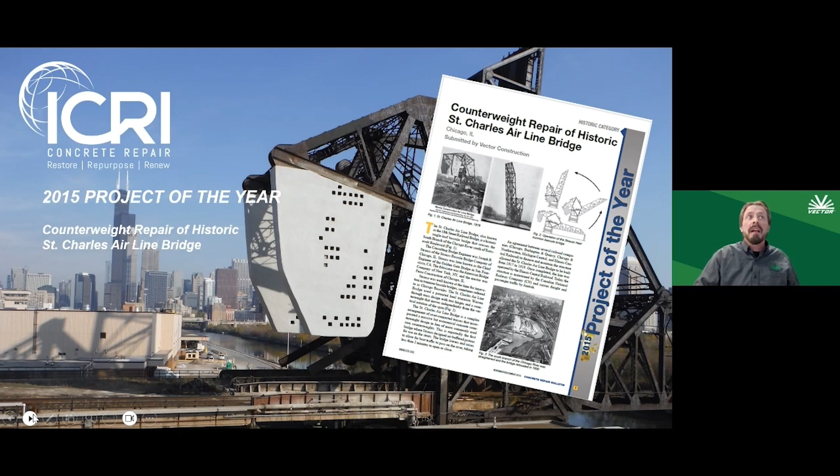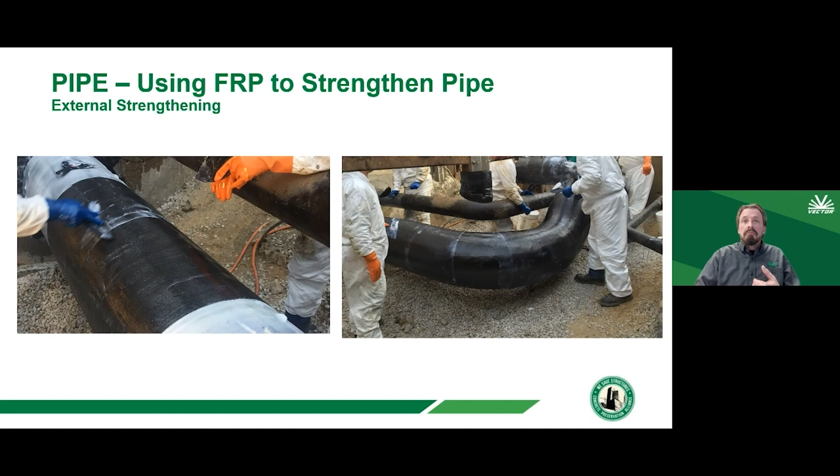I'm not going to touch on this too much, but I want you to know that FRP is used to strengthen pipe, and it's very common. It's a whole different seminar all on its own to discuss FRP applications in pipe, how it's used, how it's designed. The main thing to know is that it does exist, and if you have questions or want a more well-rounded presentation on something like this, let me know and we can arrange that. It can be used externally, internally, in a lot of different ways.

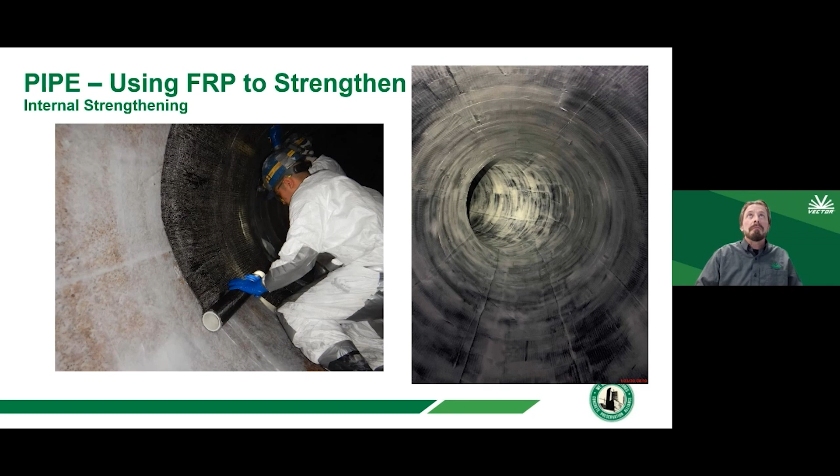So with that, we'll open it up to questions.

Thanks, Travis, that was awesome — great presentation, love the project examples. A lot of people see FRP in buildings and slabs, and to see it used on railways and wind turbines is pretty cool, and pipes and things.